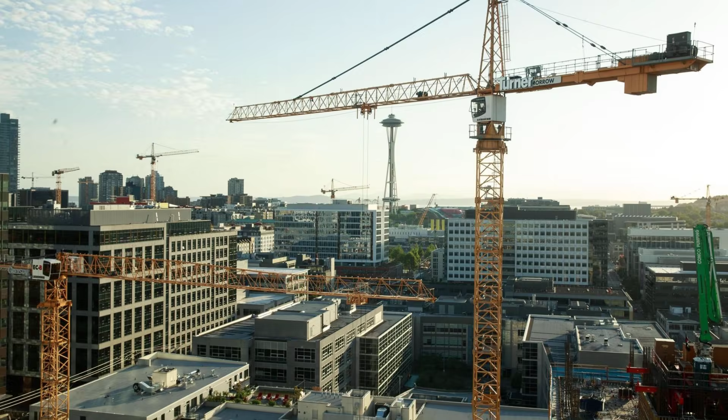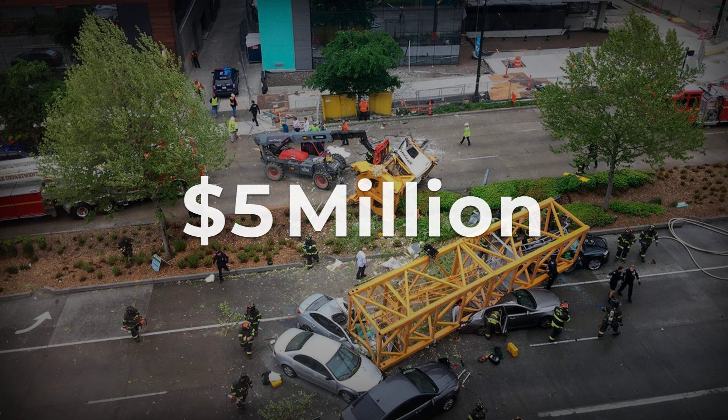November 16, 2006. Routine shutdown on a Bellevue construction site. A veteran crane operator checks his bolts and logs a troubling deflection. 5 seconds later, 210 feet of steel collapses, shattering buildings, ending a young life, and forever changing Washington's crane safety laws. This is the real story behind the $5 million Bellevue crane collapse and the warning signs no one acted on. What really caused steel to fail so silently?

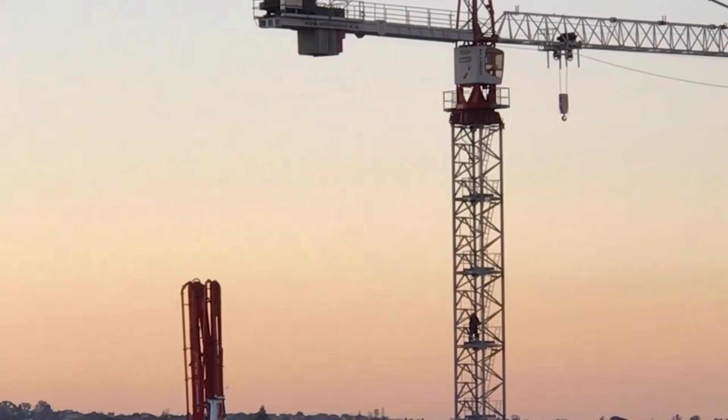Warren Yeakey started his shift in the cab of the Liebherr 112 ECH, 210 feet above the Bellevue streets, just as he had every day for months. At 34, with a decade of crane work behind him, he knew the smallest change in the machine's mood. Before powering down for the evening, he followed his ritual. 16 M24 bolts at the base, each torqued to 300 Newton meters, checked and rechecked by hand.

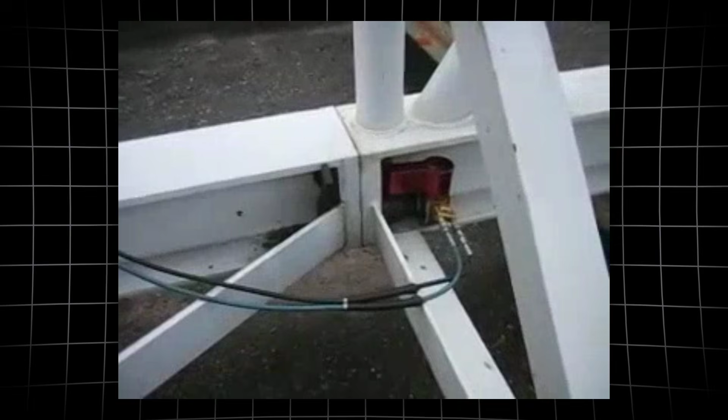He logged every reading in his notebook, noting a base deflection of 25 millimeters, more than double the manufacturer's limit. It was an uncomfortable number, but the site superintendent had brushed it off as normal settlement. Still, Yeakey's instincts told him something wasn't right. Inside the narrow cab, he listened for the familiar whir of the diesel engine idling, felt the subtle sway as the boom settled at its 45-degree angle.

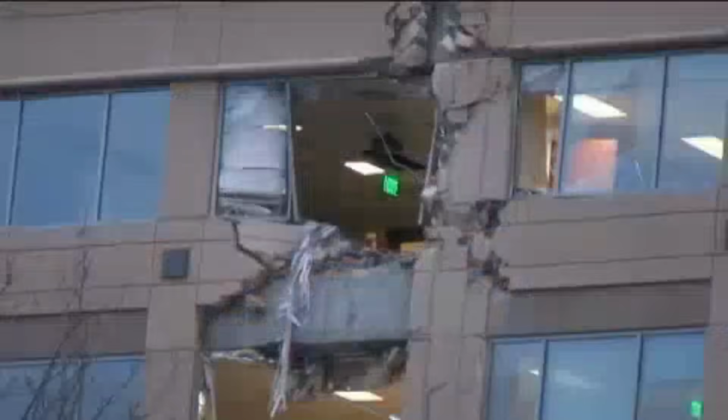The city below was winding down, sunlight glinting off glass towers. Then, without warning, a sharp crack echoed from below. For 5 seconds, the floor beneath his boots began to shift. The sensation was unmistakable, metal giving way, the world tilting. Wind rushed through the open window as the mast pitched north, 30 degrees in an instant. Yeakey grabbed the controls, bracing as the cab lurched sideways and wedged against the building's edge. The violent motion threw him against the glass.

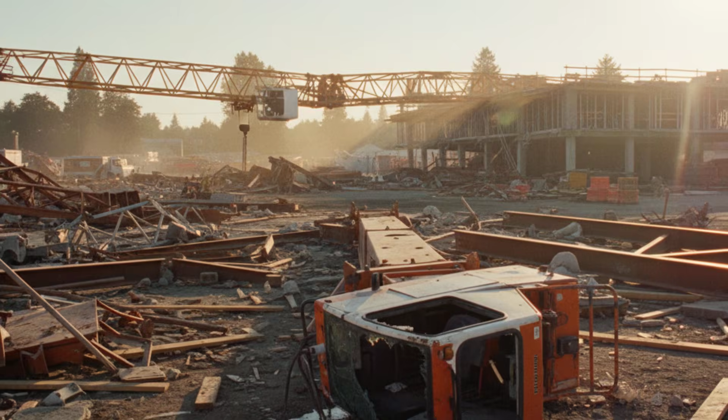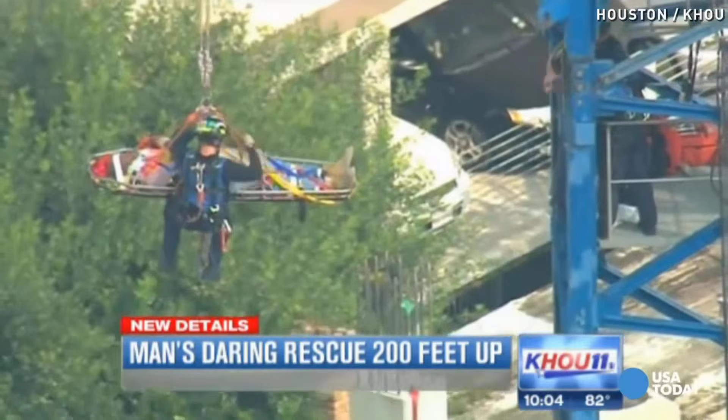He crawled through twisted steel, blood running from a cut on his forehead, heart pounding. The radio in his hand shook as he pressed the button. "It's down." Firefighters arrived within minutes. Lieutenant Bruce Croon led the rescue, extending ladders to the battered cab. Yeakey, dazed but conscious, climbed down on his own. He'd survived a 20-foot fall inside a mangled shell of steel and glass.

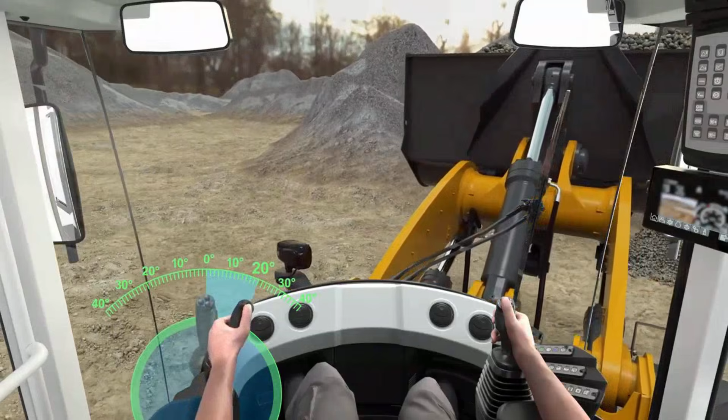Later, he would describe the moment. The instinct to grab the stick, the sense that something had gone terribly wrong, the knowledge that he had done everything by the book. For Yeakey, the memory of that 5-second warning, the crack, the sudden shift, the scramble to survive, never faded. He knew every bolt, every vibration, every sound in that machine. On that afternoon, the warning signs were logged and real, but the silent failure beneath his feet had already begun.

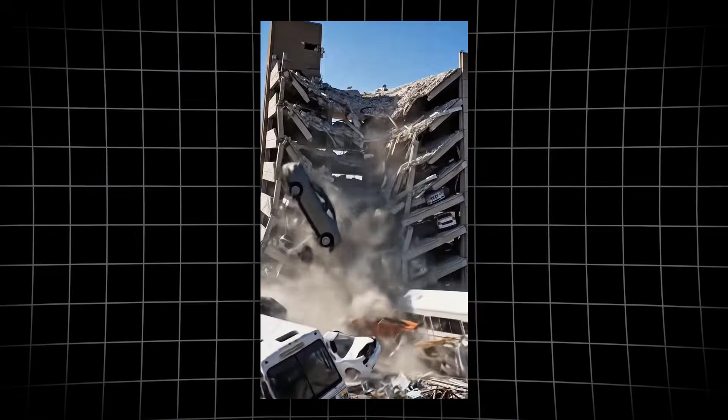At 4:15 in the afternoon, the heart of Bellevue was transformed by the collapse of a 210-foot Liebherr tower crane. The mast, once upright and steady, dropped 30 degrees to the north in seconds. Steel shrieked as the base sheared away, sending the 15-ton counterweight arcing nearly 100 feet through the air. The city's pulse stopped as a debris field spread across 200 feet, swallowing cars, sidewalks, and the lower floors of 3 buildings. Glass shattered in sheets, raining onto the street from the Civica office tower and neighboring apartments.

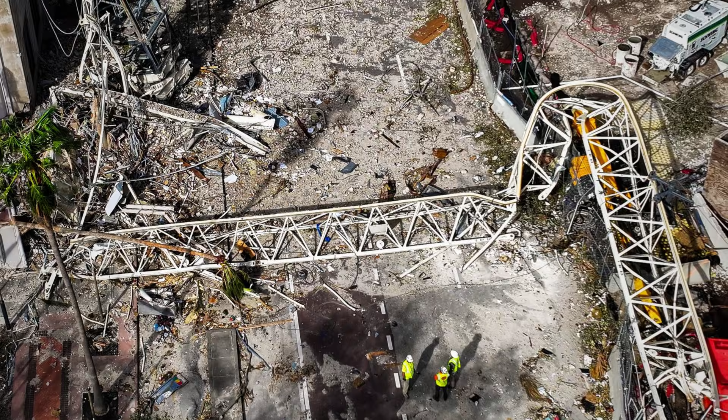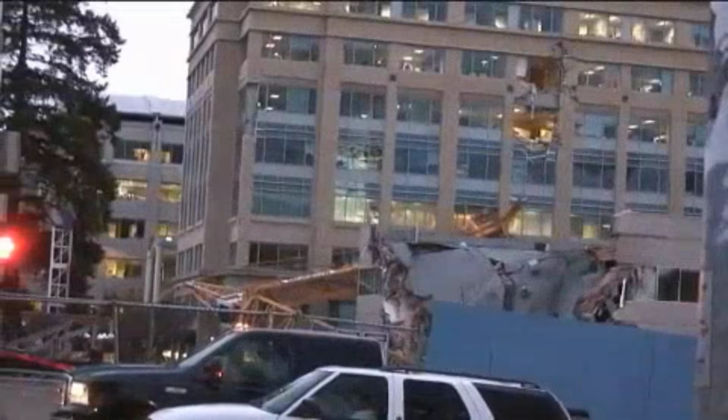Steel latticework, once part of the crane's core, punched through 15 inches of asphalt and embedded itself deep in the parking lot below. Concrete pillars snapped, the counter-jib whipped around and smashed through the parking garage, scattering fragments across the block.

Inside a 12th floor apartment, Matthew Ammon sat surrounded by the ordinary comforts of home. The wall behind him gave way in an instant as a section of the crane's structure tore through the building's skin. Ammon, just 31, a Microsoft attorney with a promising future, was killed instantly. The violence of the impact left no time for warning or escape. His parents, Larry and Kathleen, would later speak of his love for music and his dedication to justice, traits that made his loss resonate far beyond family and friends.

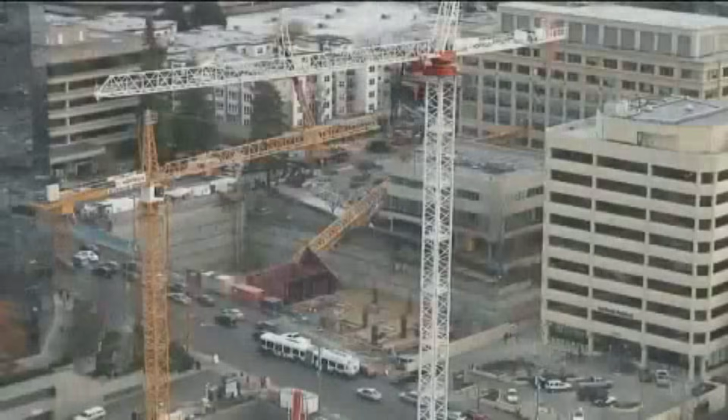Across the street, glass facades bowed and buckled, sending shards into offices and onto the sidewalks below. Steel beams, some weighing thousands of pounds, landed with enough force to crater the pavement. The debris blanketed a 200-foot radius, leaving vehicles crushed and storefronts gutted. Residents and workers poured into the streets, stunned by the destruction. The city block, once bustling with the rhythm of daily life, was left scarred and silent.

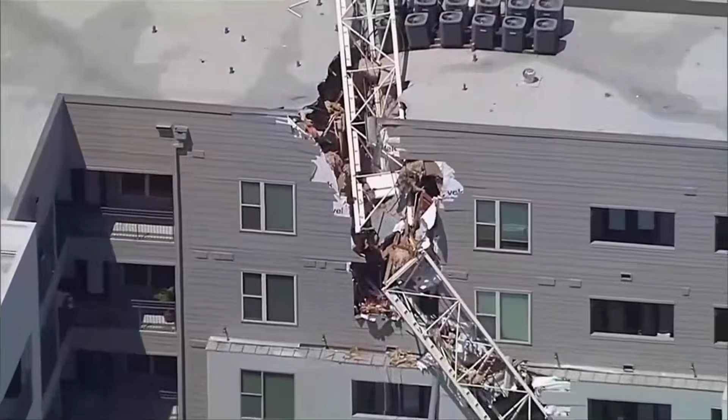The collapse was not just a failure of steel and bolts. It was a disaster that reached into homes, offices, and the lives of everyone nearby. The scale of the destruction forced a reckoning with the risks embedded in the city's rapid growth. For Bellevue, the loss of Matthew Ammon became a symbol of the hidden stakes behind every crane that rose above its skyline. The aftermath demanded answers, not only about what failed, but how a single engineering decision could ripple through an entire community.

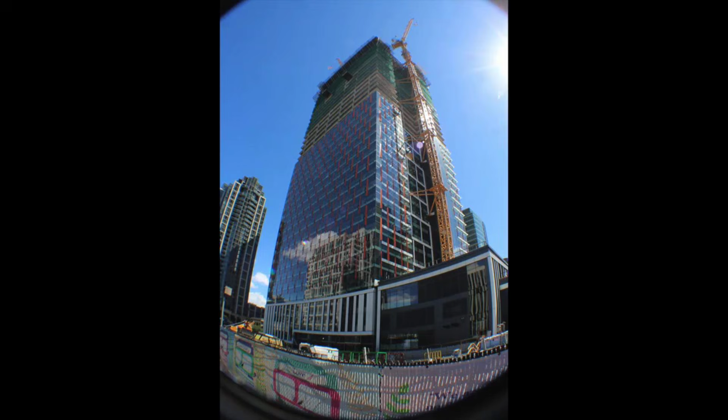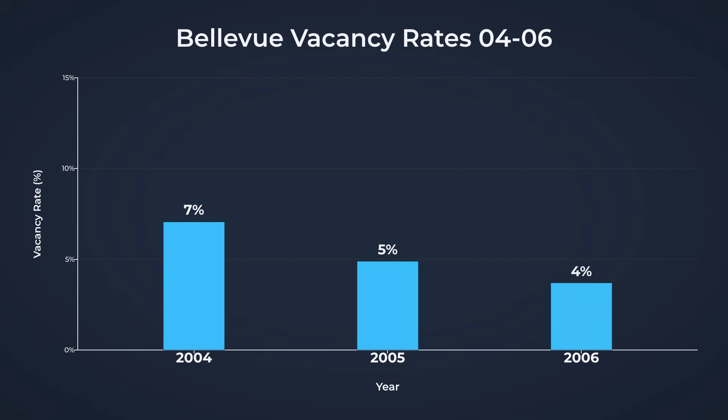By 2006, Bellevue's skyline had become a forest of cranes. From the city's core to its edges, more than 24 tower cranes worked above the streets, their booms swinging over new office towers and high-rise condos. Developers raced to keep up with the flood of technology companies expanding into the region. Microsoft's growth alone drove demand for millions of square feet of premium office space, with Class A vacancy rates dipping below 5%, sometimes as low as 3.8%.

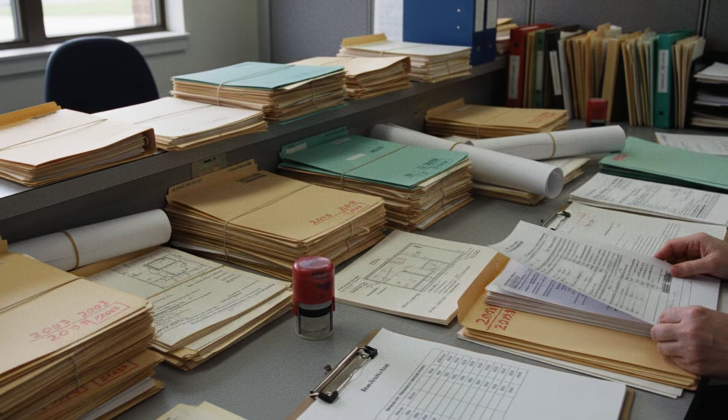Every new project promised to fill before the last window was even installed. Permitting records told the story in numbers. Annual commercial building permits jumped from around 180 in 2003 to over 240 by 2006, a pace that outstripped even Seattle's downtown. Construction managers juggled not just blueprints and schedules, but the relentless math of delay penalties.

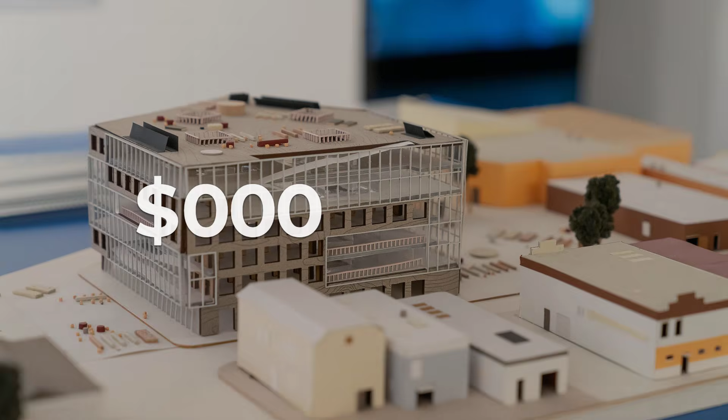Contracts for projects like Tower 333 included liquidated damages of $15,000 for every day the job ran late, with weekly penalties sometimes topping $200,000. For a $100 million office tower, a single week's delay could erase months of profit. With so much at stake, every piece of machinery became a critical link in a tight chain.

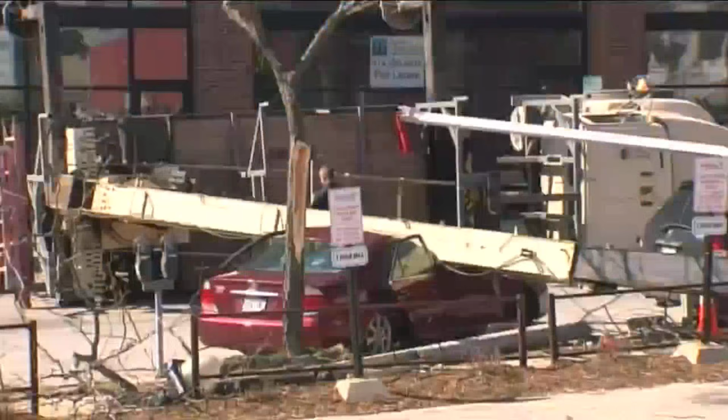A single hour of crane downtime didn't just slow the work on one floor. It rippled through the entire site, backing up deliveries, idling dozens of workers, and straining relationships with investors watching the clock. Maintenance contractors faced their own pressures, with bonus incentives tied to uptime, not caution. Inspection cycles stretched as crews tried to avoid triggering stoppages that would cost thousands before lunchtime.

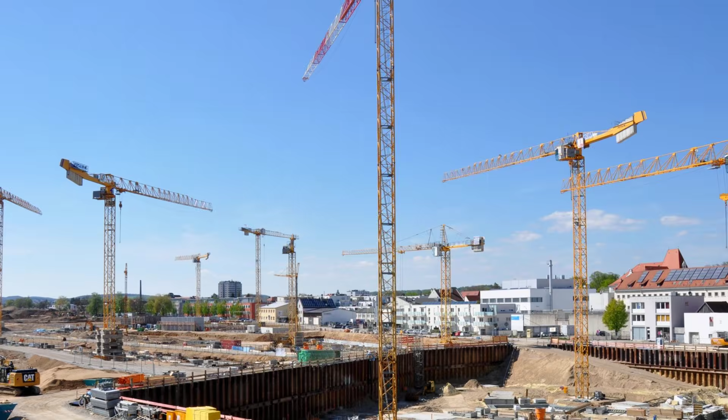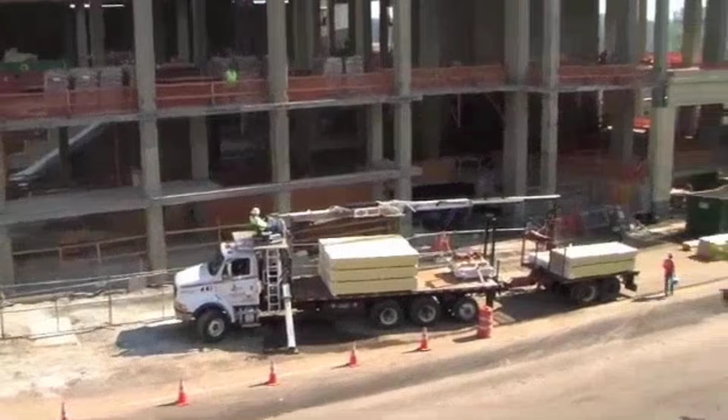The city's appetite for new space meant that residential towers filled up almost as quickly as they opened, with occupancy rates of 80 to 90% within half a year. The absorption rate for office space, over 2 million square feet per year, set records for the region. Developers, architects, and contractors all felt the squeeze, the need to deliver fast, to innovate, and to keep the skyline growing. In that environment, even a minor design shortcut could seem like a smart bet, a way to save $500,000 or 2 weeks on the schedule.

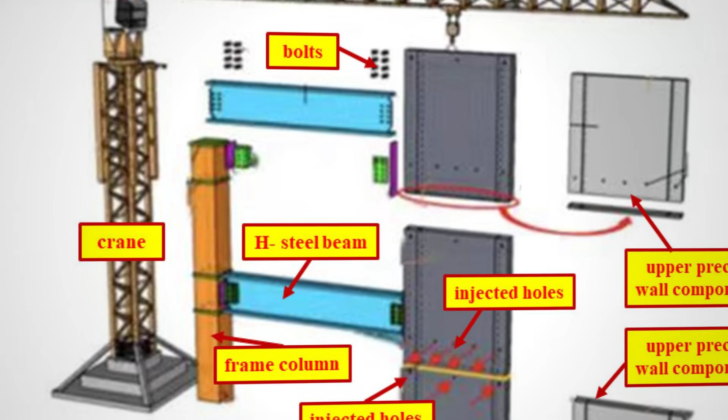The boom years brought prosperity and optimism, but they also introduced risks that would only become clear when the pressure finally overwhelmed the system. The decision to build the crane on an H-frame grillage rather than a traditional concrete pad started as a solution to save both time and money. The site's parking garage, still curing below, made a massive concrete foundation impractical.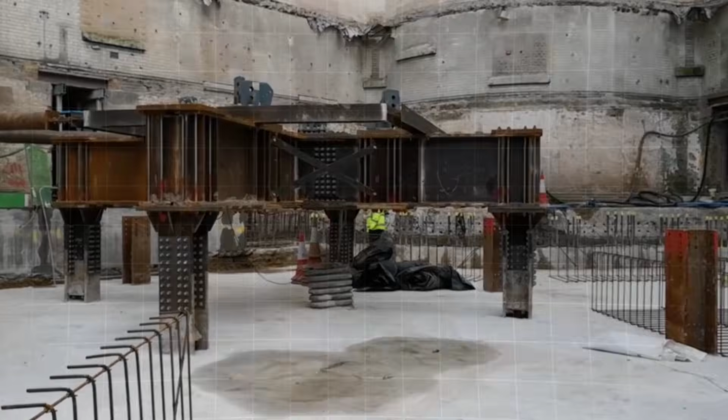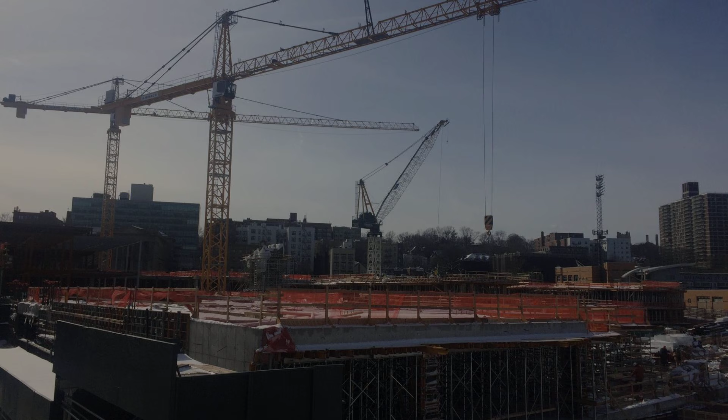Instead, 4 concrete pillars supported a welded frame of W14x30 steel I-beams, bolted together and anchored at each corner. This approach shaved $500,000 off the budget and promised to keep the project moving on schedule, 2 weeks faster than the usual method. But the shortcut came with hidden risks.

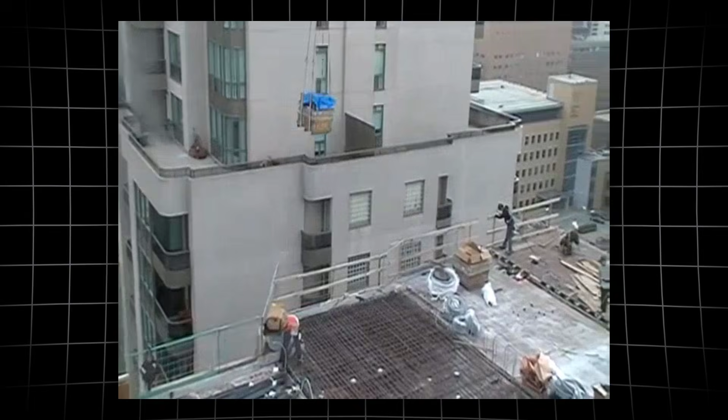The engineering drawings called for temporary steel ties to connect the crane's base to the building's concrete core. These ties would provide about 40% of the lateral resistance needed to keep the mast upright against wind, slewing, and the shifting of heavy loads. The plan assumed the core would be poured and the ties installed before the crane saw full service.

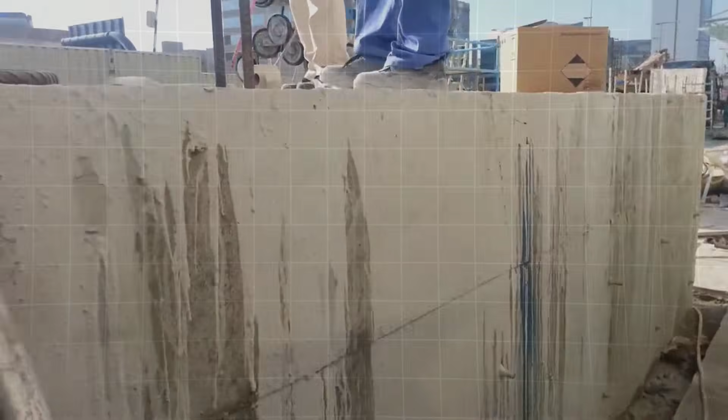But as delays stacked up, 8 weeks waiting for the garage slab to cure, those ties never materialized. The contractor pressed ahead, working around the missing support without formally notifying the engineer. On paper, the system looked complete. In reality, the base stood alone. Without the ties, every wind gust and movement of the boom put extra force on the H-frame.

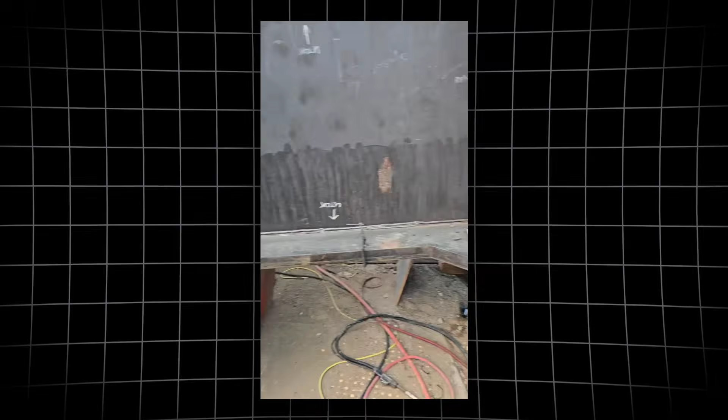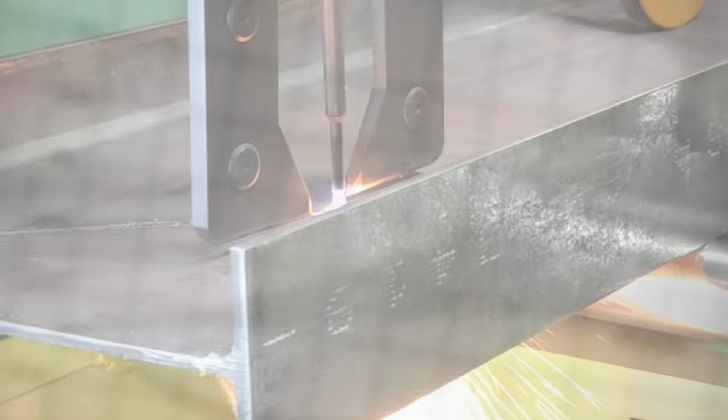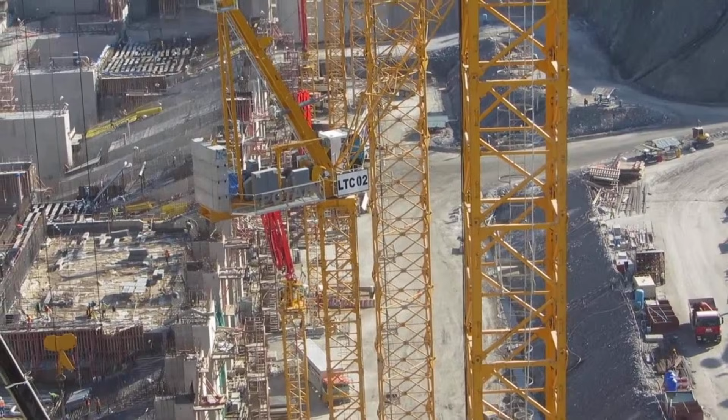Calculations after the collapse showed the base had to absorb up to 250% more lateral load than it was designed for. The steel I-beams, with their T-shaped cope cuts and web stiffeners, became focal points for stress. Each weld and bolt, meant to act as a backup, now carried loads that should have been distributed through the building's core. The 16 M24 bolts at the corners were designed for shear, but not for the relentless, off-axis twisting that built up as the crane cycled through daily work.

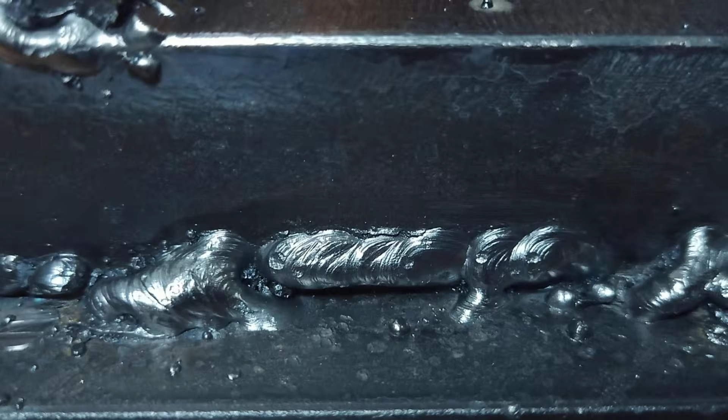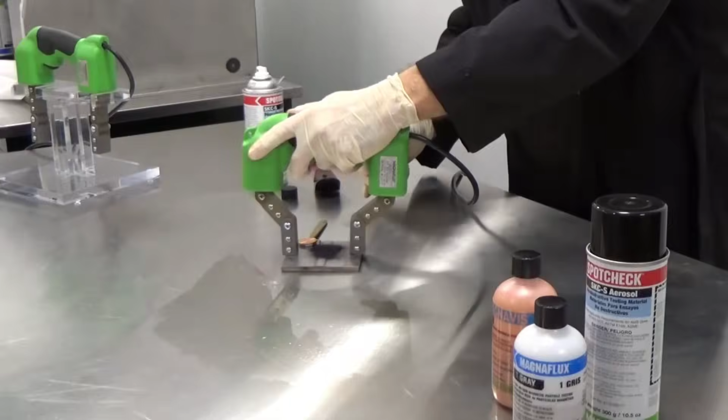The geometry of the H-frame, sharp corners, cutouts for stiffeners, and the absence of continuous bracing created natural points of weakness. Stress concentrations at the weld toes multiplied the force on small areas, increasing the risk of fatigue with every turn of the boom. Over months, vibrations from idle engines and slewing amplified the problem, loosening bolts and accelerating microscopic cracks.

The design relied on a chain of assumptions: that the core would be ready, that temporary conditions would be short-lived, that each piece would do its part. When those assumptions failed, the entire base was left exposed. For the engineer, the calculations stopped at the boundary of what was communicated and confirmed. For the contractor, the pressure to keep the schedule left little room for pause.

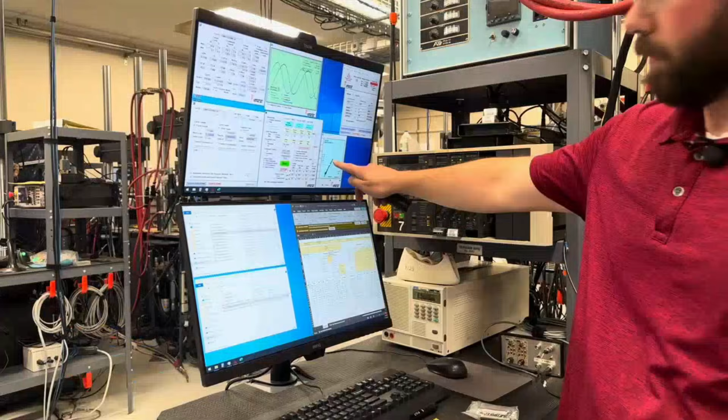The result was a foundation that looked sound from a distance, but was quietly accumulating damage at its most vulnerable points. The decision to gamble on speed and savings set the stage for a failure that would not reveal itself until it was too late.

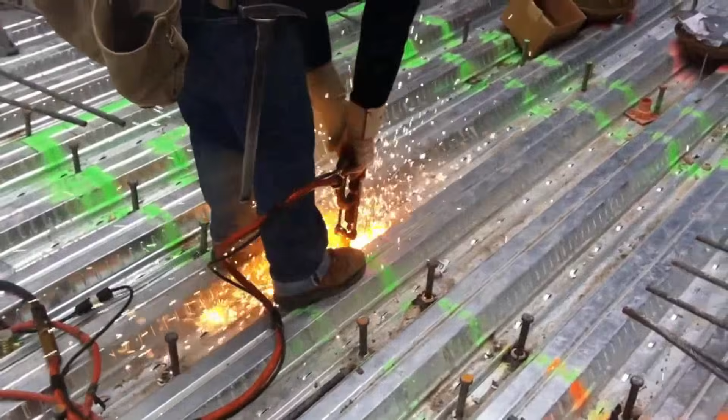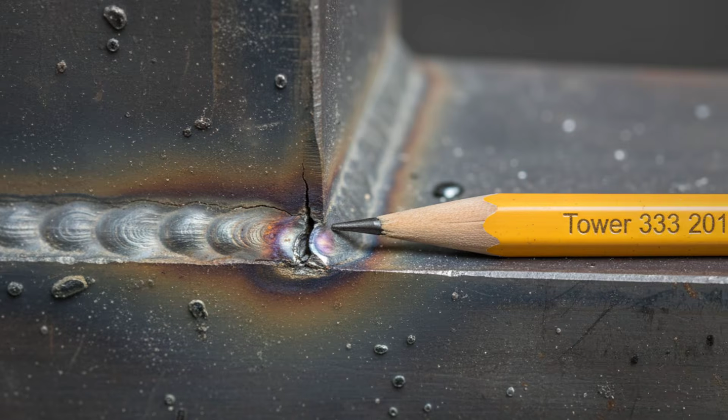Ironworkers on the Tower 333 site felt the tremors before anyone else. Each morning, as the crane idled and the boom swung to rest, a low-frequency vibration rattled through the H-frame base, 5 to 10 cycles per second, enough to make tools dance on the steel. A welder, crouched by the cope stiffener, spotted a hairline crack at the weld toe during a bolt retorque. It was thin as a pencil mark, but ran longer than his thumb.

He mentioned it to a rigger, who shook his head and suggested magnetic particle testing or dye penetrant, methods that could reveal hidden flaws without tearing anything apart. The rigger's voice was flat. "This ain't right." The site superintendent listened, but waved off the concern.

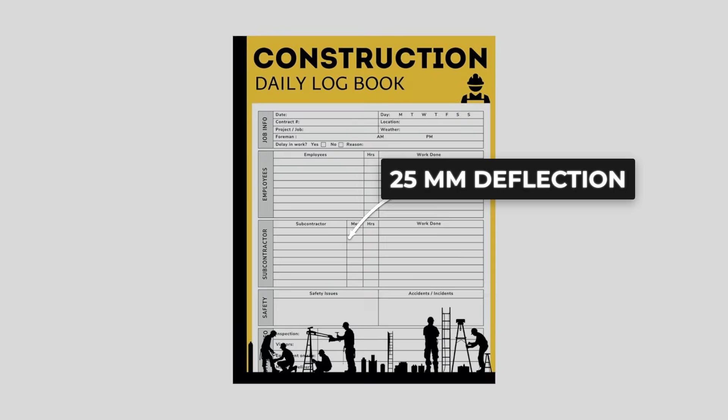He logged the 25mm deflection as routine settlement, classifying it as low risk. The crane had to keep running. Every hour offline cost the project $2,000 in lost revenue, not counting the threat of daily penalties. Non-destructive testing was skipped to avoid delays, and inspection cycles stretched thin. Maintenance bonuses were tied to uptime, rewarding those who kept the machine moving, not those who slowed it down for

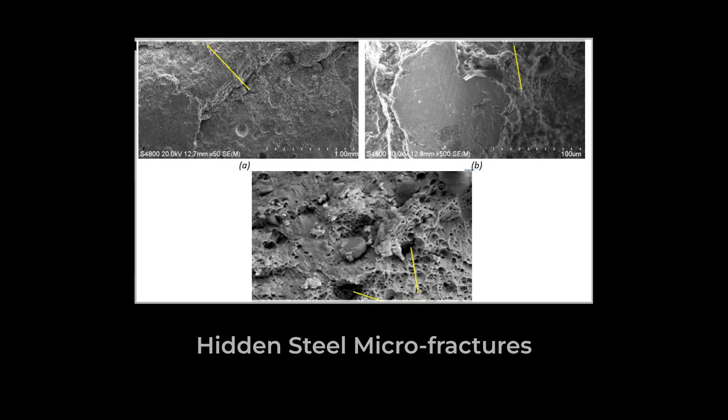caution. In the break room, workers traded stories about the old days, how before OSHA, men relied on their senses and gut instinct. On this site, warnings traveled by word of mouth, rarely making it into official logs. The engineer assumed the temporary core ties were in place by the third climb. The contractor never corrected him. Communication broke down, and with it, the last chance to catch the silent fatigue growing in the steel. The culture of speed and silence left the base exposed, its flaws hidden beneath layers of urgency and routine.

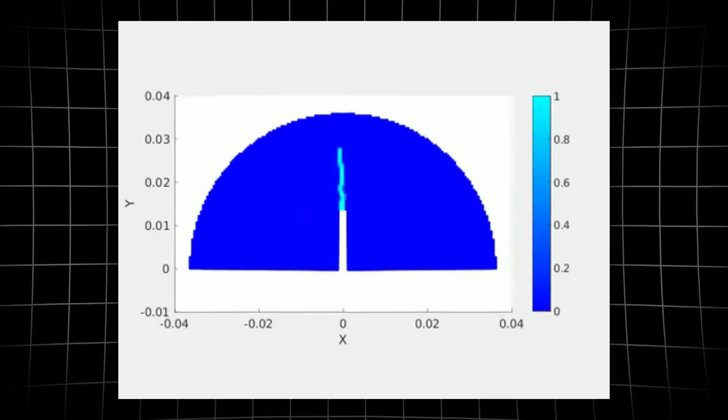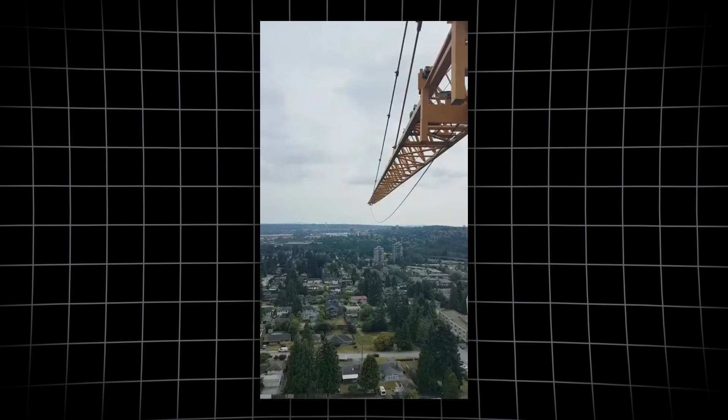Metal fatigue in the H-frame base began as a microscopic flaw, invisible to the naked eye, but relentless under the crane's daily rhythm. Each startup, every idle vibration, and the repeated swing of the boom sent waves of stress through the welded joints. At the weld toe, where the geometry forced the steel to bend and flex, a crack just 0.5 millimeter wide began to grow.

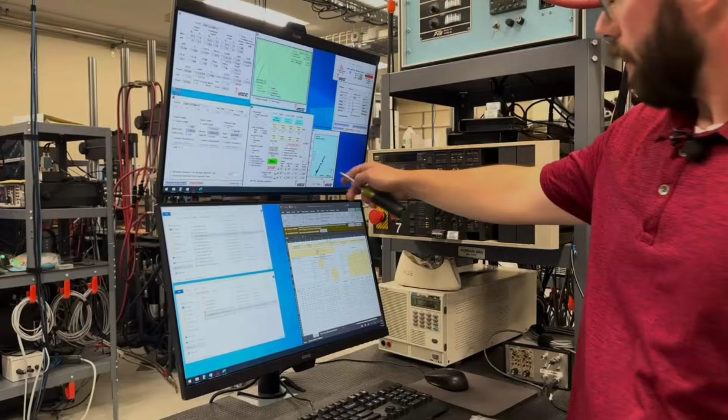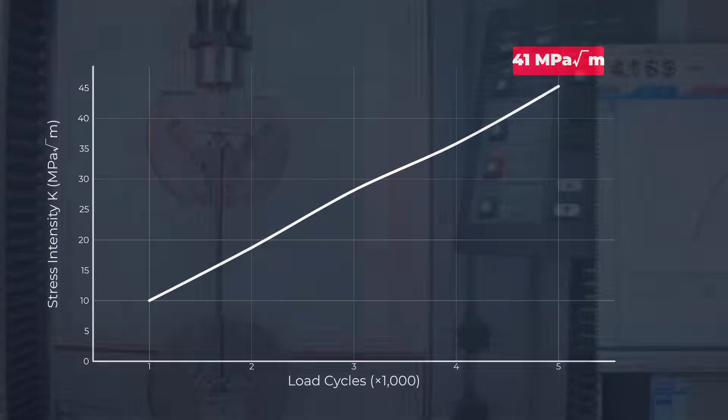Paris law, da/dN = 2×10^-12 ΔK^3, mapped the pace. With each cycle, the crack lengthened, the stress intensity factor climbing from 10 to over 40 MPa√m. The process was slow at first, measured in microns, but exponential. Doubled stress meant an eighth as many safe cycles.

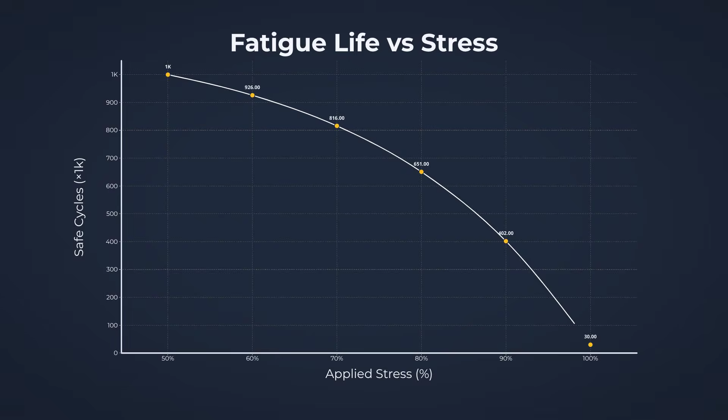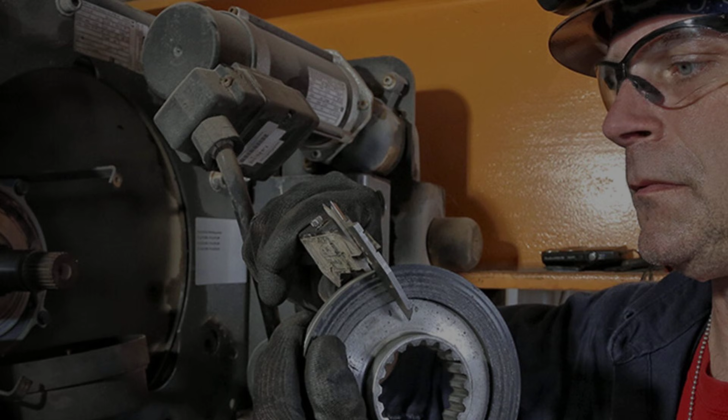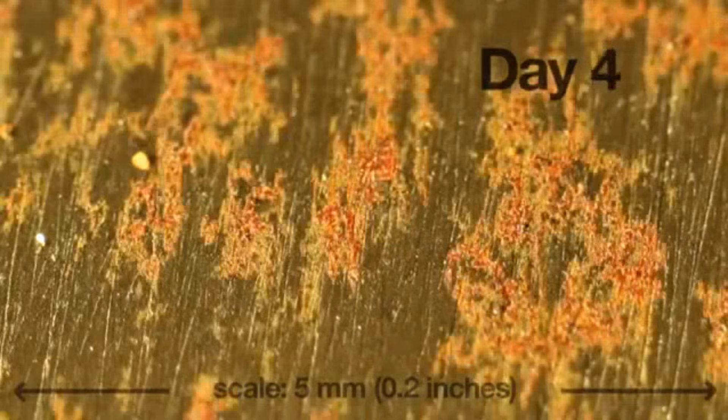Beach marks, each just a fraction of a millimeter apart, recorded the history of these advances, like rings in a tree. By the time the crack reached 12 inches, a critical length for this design, over 1 million cycles had passed. Miner's rule, the engineer's tally sheet for lifetime damage, showed the cumulative effect. Every idle hour, every gust of wind, every load added to the total until the sum reached 1. The steel's resistance, already weakened by corrosion in the Pacific Northwest's damp air, finally gave way.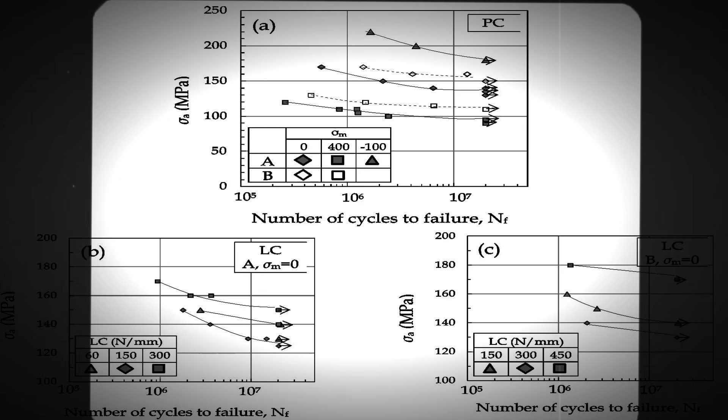8 M24 bolts sheared in quick succession. The base slid north, friction lost. The mast buckled. There was no sudden overload, no extraordinary force, just the silent, mathematical certainty of fatigue. The collapse unfolded exactly as the equations predicted, each stage matching the forensic models built after the fact. The inevitability was written in the numbers long before the final fracture ever reached daylight.

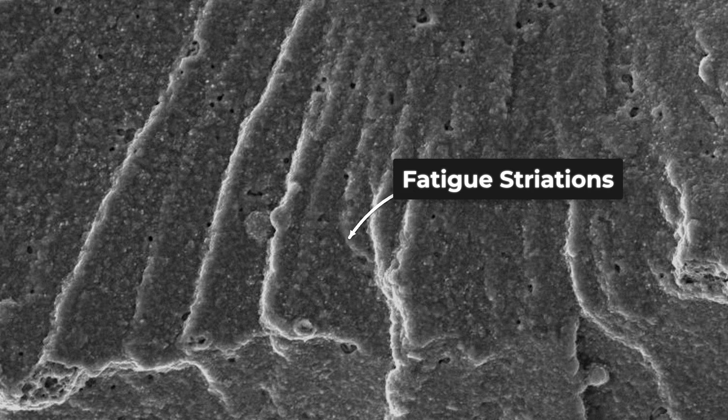Washington Labor and Industries investigators spent 6 months in the laboratory, piecing together the story hidden in fractured steel. Under the scanning electron microscope, the base welds revealed striations, parallel lines just 1 to 5 microns apart, each marking a tiny advance of the fatigue crack over thousands of cycles. These beach marks, distinct and regular, matched the operational history logged on site.

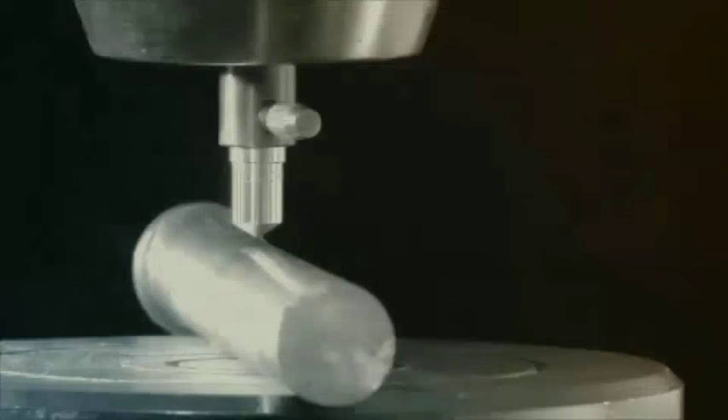Hardness tests measured Rockwell B values between 80 and 90, confirming the steel had not lost its basic strength, but Charpy V-notch impacts told a different story. A 20% loss of toughness near the welds, likely from corrosion in the humid northwest air. No brittle cleavage, no signs of overload, just the classic fingerprint of metal fatigue. The evidence was clear. The collapse began at a microscopic flaw, growing steadily until the final fracture, sealing the chain of cause beyond any doubt.

Legal consequences followed swiftly. In 2011, a King County jury awarded Warren Yeakey $1.45 million for injuries and trauma, citing negligence in the base's design and inspection lapses. The Ammon family's wrongful death lawsuit, filed against the contractor and engineering firm, settled in 2015, part of more than $5 million in total damages, including property loss and a halted project. But the most lasting impact came from the State House.

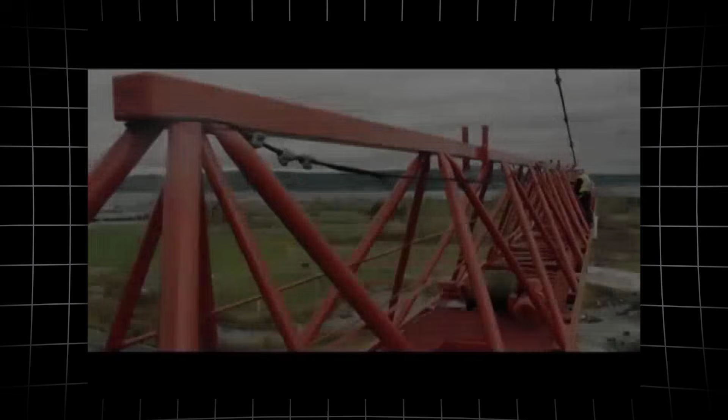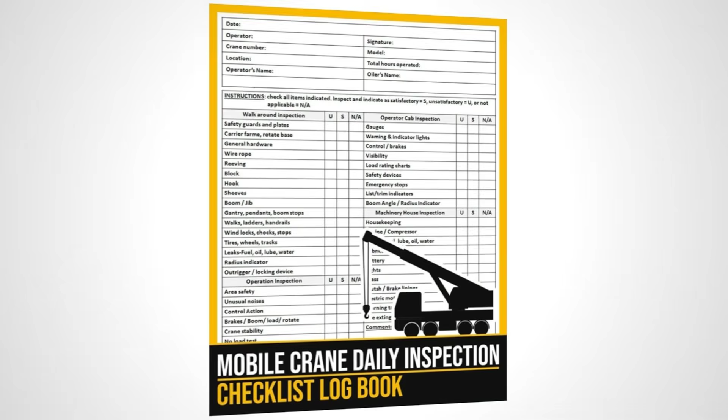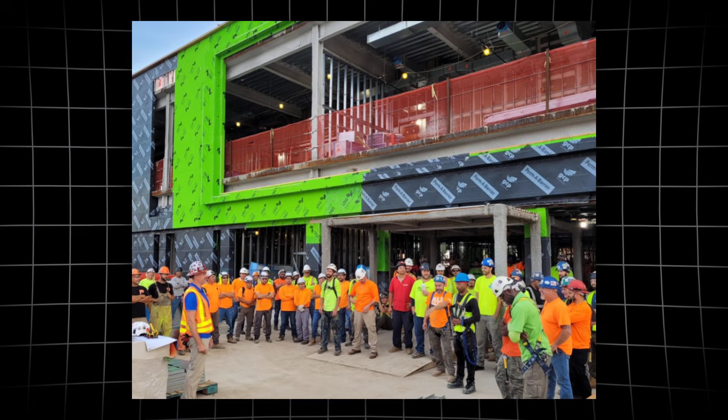Washington lawmakers passed Senate Bill 6027 in 2007, creating some of the strictest crane regulations in the country. The law required annual third-party certifications for every crane, mandatory operator training, and independent base design reviews using finite element analysis. Non-destructive testing became routine, and clear documentation replaced word-of-mouth approvals. Within 5 years, state data showed crane-related fatalities fell by half. For families, workers, and city leaders, the reforms stood as a response written in statute, a direct answer to the failures that cost a life and scarred a city.

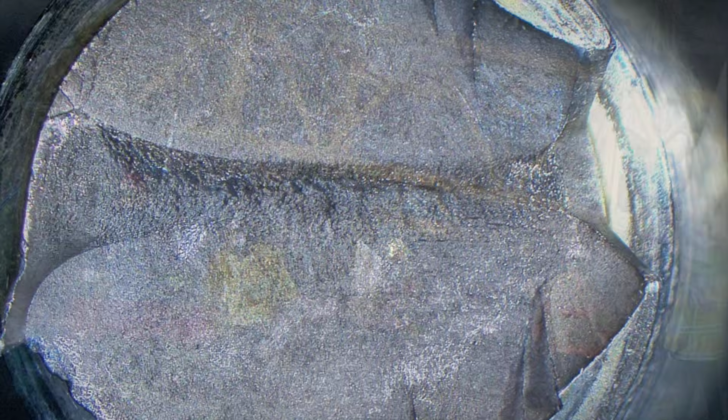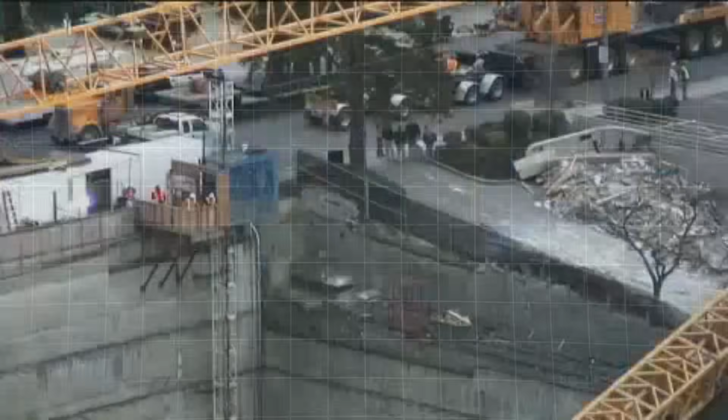At 4:15 p.m. on November 16, 2006, a 210-foot tower crane fell in downtown Bellevue, killing 1 resident and causing over $5 million in damage. Investigators confirmed that metal fatigue in the base's H-frame, compounded by missed warnings and a lack of required non-destructive testing, led directly to the disaster.

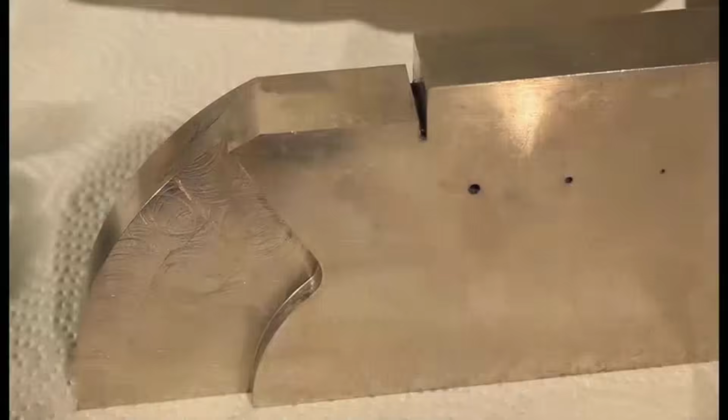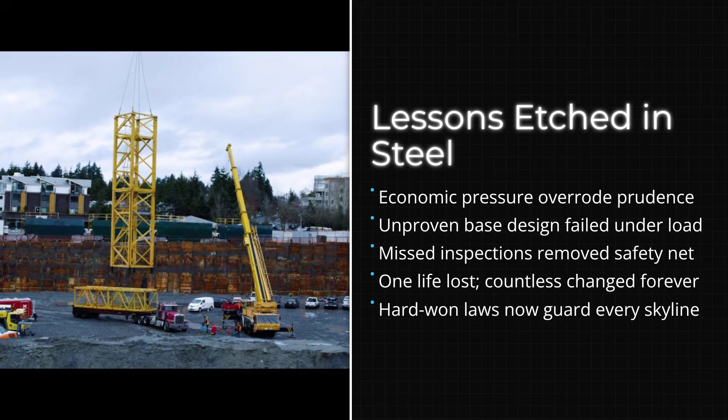Despite detailed forensic analysis and new laws like Washington's Senate Bill 6027, which cut crane fatalities by 50% within 5 years, some questions remain. The original engineering correspondence and full decision trail for the H-frame base have never been publicly released. What is clear: economic pressures, unconventional design, and skipped inspections combined to expose fatal weaknesses.

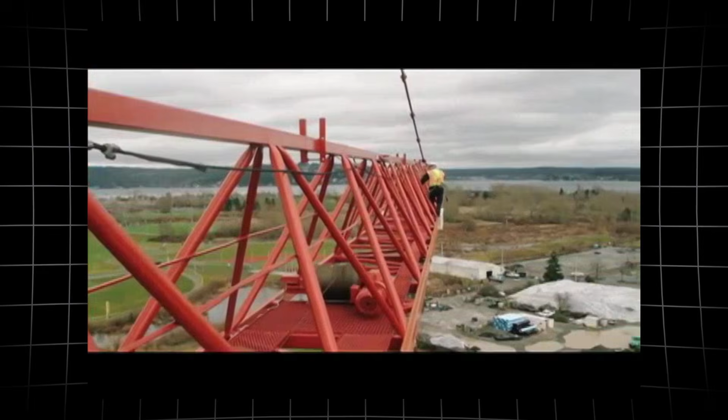Today, every major crane in Washington is subject to independent certification and stricter audits. The Bellevue collapse stands as documented evidence that rigorous standards and open communication save lives, lessons written not in theory, but in steel and loss.